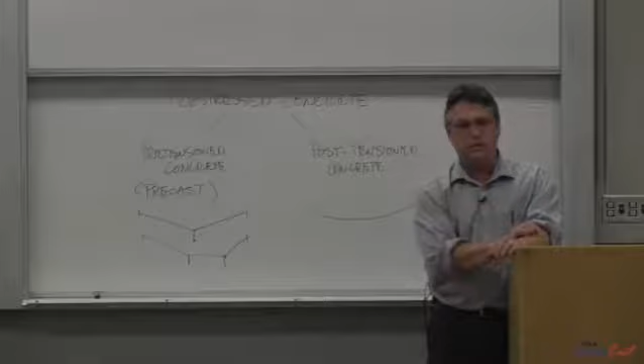While that's warming up, does anybody have any questions? I know you guys do.

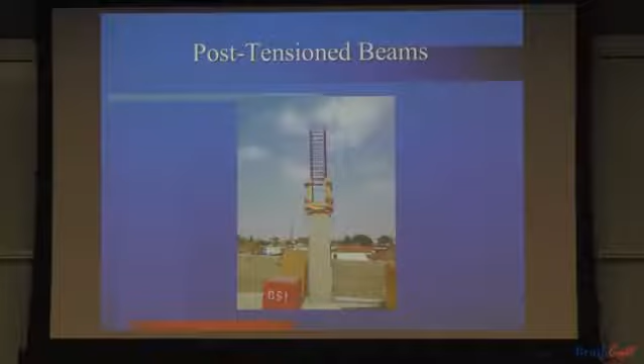This is a job, I think in Buena Park. This is a column, no big deal. This is waiting for a beam, and you are going to design in your project a 2-span beam, very much like the beams I'm about to show you. But this is how it gets constructed. The column comes first, there's a cold joint at the bottom, the steel beam form will fit right in there, and that beam will be coming out at us.

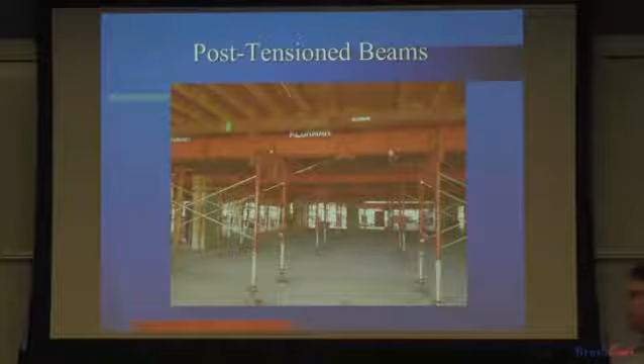I like this. I'm not doing much anymore, but for a long time in my career I did design-build, which meant I worked for contractors. On this particular job, a big one in Buena Park called the Source, we got the big parking structure. You'll never guess who the contractor was - Bill Klorman. He puts his name on everything, you can't drive by that site without seeing his name about 50 times. Good friend of mine, wonderful guy. In case anybody steals his forms, everybody will know where those forms came from. But he's a brilliant contractor and advertiser.

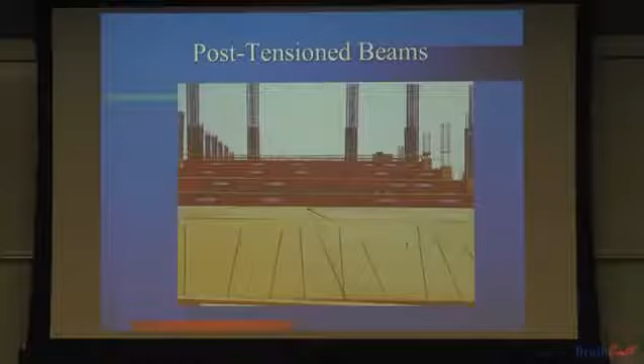This is a ramp, we're actually there building the forms. This is the plywood forms going on those steel beam forms. This is the ramp that's going up, that's why you can see all those - they're right in the middle of placing all of the plywood to make this ramp. So after this gets formed, this is the plywood.

We pre-stress lots of things, we pre-stress everything we can. This is the slab, this is the red - I don't see colors well, but I know that that's red. Is the slab pre-stressing steel? It's post-tension, it's actually in plastic sheathing, and if you come down to Coronado you'll see it in plastic sheathing. You'll be able to touch it - it's dirty, but you'll get a good feel.

We wrap it in plastic, and I'll show you those pictures in a minute, but the steel is actually inside the plastic. We want it to be able to move freely. It's greased, and the sheathing may bond to the concrete and will, but the steel inside that sheathing moves at will, and that's how we're able to stress it. The steel will move, the concrete won't. So there is no compatibility like you're used to, strain compatibility in post-tension concrete. You're used to strain compatibility in reinforced concrete because it's bonded. Post-tension concrete is not bonded. Makes it more difficult to understand and confuses people, but it also makes it great - by unbonding it, we're able to do some pretty incredible things.

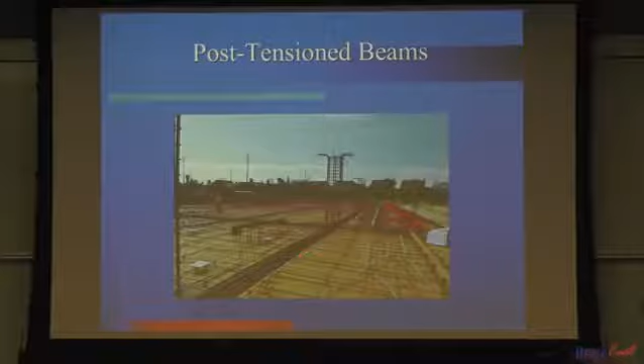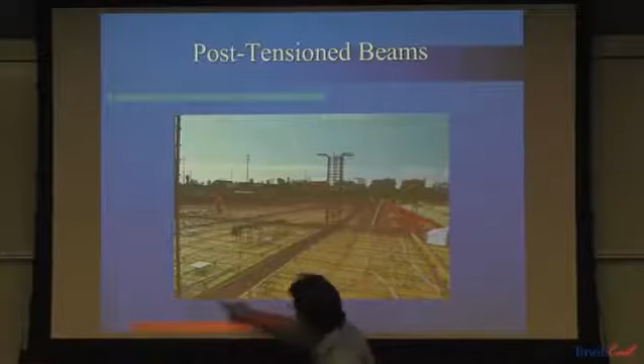So these are the beam forms, these are steel beam forms. That's a girder, these are the columns. The slab is post-tension, and if you can see, the beams are post-tension. This is actually what you are going to design in your project, a 2-span beam with draping post-tensioning steel.

That's a close-up, in this particular case a different job. The post-tensioning is black - every supplier has their own color, it just differentiates them. There's no difference between a red post-tensioning cable and a black one or a green one or a blue one, it just depends on who made it. Everybody knows DSI makes the black cables, and Millennium puts out the red, and you just know by looking at the color of the steel who made it. But this is a joint - we will take the post-tensioning steel high over the support and then drape it down in the saggy span where it wants to droop, and we will stress it, and we'll want to lift that beam.

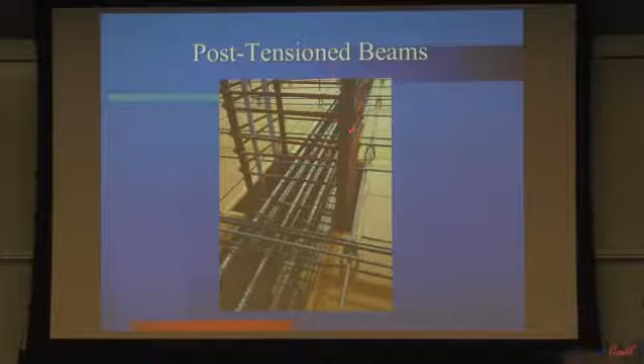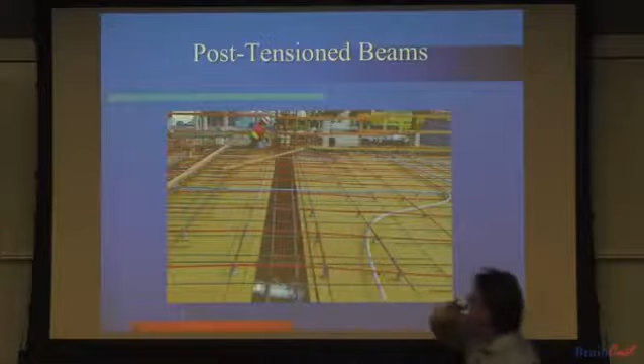This is looking right down the beam. I'm actually straddling it, taking this picture right there. But you can see this steel low, and then it's making its way up and splaying out at the anchorage zone at the column. And of course, this is the slab, also post-tensioned, high over the support, low in the span.

That's the way you would want to drape it, because when you stress it, it's going to try to straighten out. And when it tries to straighten out with stiff concrete, that lifts that concrete. We're shooting for not only compressing concrete, but keeping it flat. That's what's kind of amazing about post-tension concrete - we can effectively walk away from a building that doesn't deflect. It's damn near flat, straight, compressed, and almost crack-free.

And I'm in salesman mode now, it's less expensive. There's less concrete and there's actually less reinforcing. So why isn't every building pre-stressed? That's a great question. They all should be. They should.

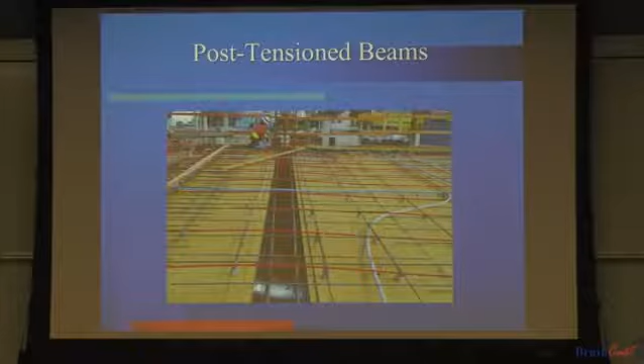I am baffled by why any building is reinforced concrete, and I really mean that. I've been designing on my own since 1997, the end of 1996. I've never designed a reinforced concrete building because I had the option of designing a post-tension concrete building using less concrete. It's less expensive, it performs better, it's almost crack-free and it's compressed. So to me, it's always pre-stressed. If it's really small and I'm doing somebody's garage or something like that, maybe not. But I've done a few things for friends.

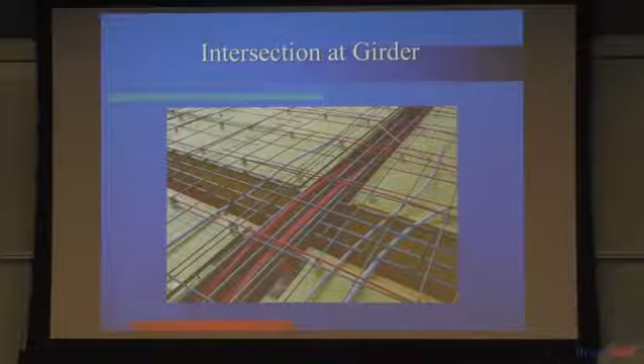So this is an intersection at a girder. There can either be a column supporting a beam, or there can be a girder supporting the beam. This is a big parking structure, so they couldn't have a column here because that's the drive area. You're looping around, circling around in a parking structure, always going under a girder. From now on, you guys should never be looking at where you're going - you should be looking up at the framing. That's what I do. I'm surprised I haven't gotten in any accidents.

This is the anchorage zone. These are the tails, just sticking out of the forms. This is just draped in there - there's no stress in it right now at all. It's just laying in there unstressed. It will not even think about being stressed until after all that concrete is poured and cured.

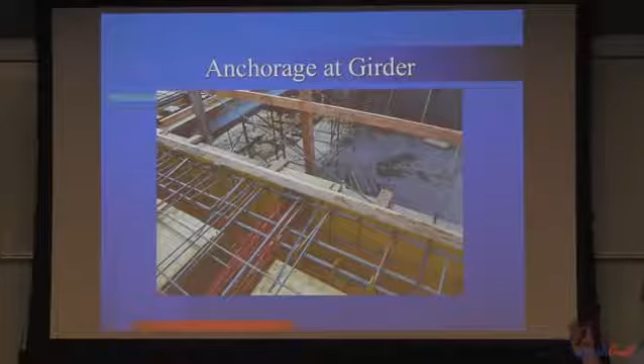We may specify 5,000 psi concrete, but we will let them stress at 3,000 psi in 3 days. So we use what's called high early concrete - that concrete accelerates very quickly. They will pour it often on Thursday, and on Monday - this is all around the Southern California area - they're pouring post-tension concrete on Thursday everywhere, and they're stressing it on Monday. That is the typical cycle of basically every job I've ever worked on. So Thursday is a big pour day in the Southern California area.

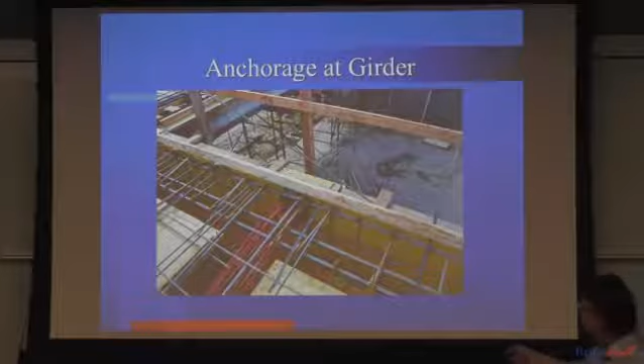But it's just sitting in there. These are pocket formers - you have to create a pocket so the jack that I'm going to show you can get in there and stress on it. But we leave a tail hanging out there so the jack's got something to grab.

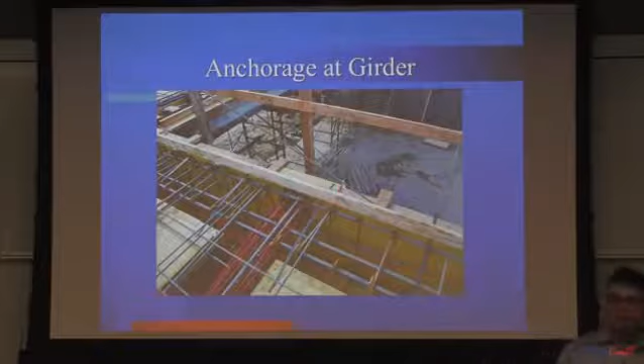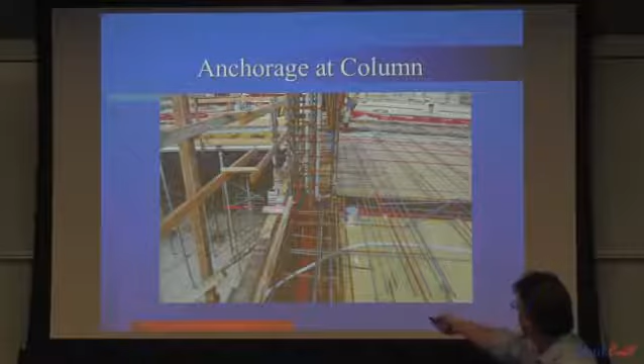Here's a beam coming in. The tendons have come up high and then they've splayed out. And there are anchors over here, and this is hanging out of the backside of a column.

This is a job called Midtown Crossing. It's actually, I think, 4550 West Pico. It's not far from here at all. It was kind of fun - I think this was 2011 that this was being built, and I was teaching this class, so I actually brought a few students over to see this being done. But I would actually just take pictures and then stick them in and bring them to class. I think there is parking, there's retail up on top now. There's a big Lowe's and a couple department stores next door.

This is after the concrete has been poured. It's hardened, the tendons have actually been stressed. And there's no beam form there. So once that thing is stressed, this is the amazing thing about pre-stressed concrete also - not only is it cheaper, not only does it come out with a better product, you can pour it on Thursday, stress it on Monday, and strip all the forms Monday afternoon. And that building stands there - it is standing up, holding itself up.

In reinforced concrete, how long - it's okay if you don't know this, but if you want to take a guess, it's fine, I don't expect you to know the answer - how long do you have to leave the forms in there before it's safe enough to pull them down and that structure won't collapse?

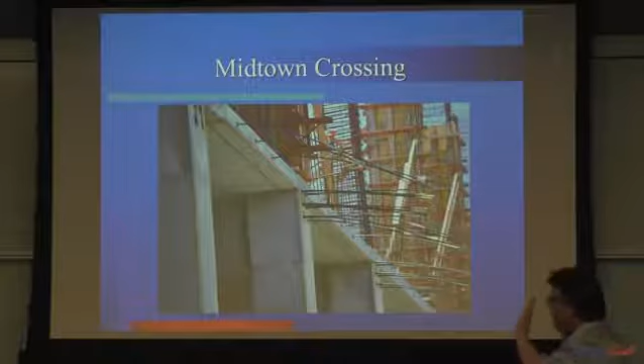I mean, there's nobody who can be doing anything. They can't be finishing concrete, they can't be stripping, they can't be working or doing anything in there. It's a jungle of forms.

But with pre-stressed concrete, we stress it, we pull it. I mean, 4 or 5 days later, you have free access underneath to start all the other trades: mechanical, electrical, plumbing. The guy's got to paint the stalls, put in carpeting if it's a bank, whatever it is, they have free access to it. Another one of the many amazing things.

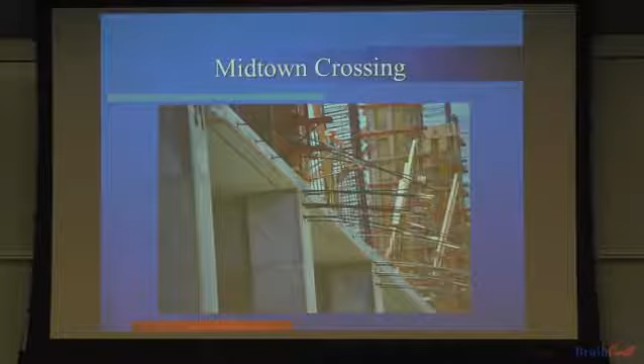This is a seismic shear wall. In California, I told you, become a specialist. I'm a specialist in pre-stressed concrete, particularly post-tension concrete. We're all specialists in seismic design. Every structural engineer in California is a specialist in seismic design. You have to be.

So that's a shear wall, that's a pocket waiting. Actually, I believe this is waiting for a girder, and these are waiting for beams to come in. But we give them a nice pocket to come and rest in.

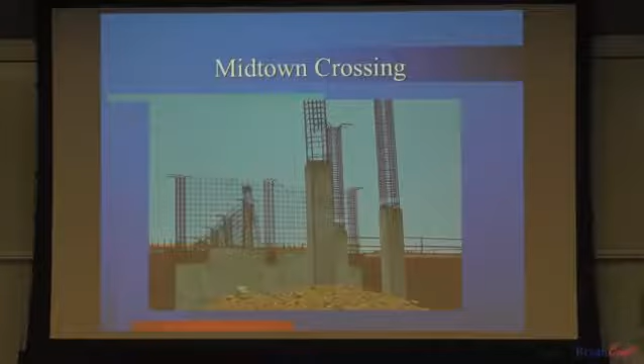People make mistakes, and I'm running into this a lot when I'm dealing with some of the code things that I try to review, examples done by academics and code people. And I can't tell you how often they forget that there's got to be a cold joint. Concrete's poured in stages. The columns get poured up to the bottom of whatever the floor system is, the beam, the slab, whatever it is, and that creates a cold joint. We need to connect one piece of concrete to another piece of concrete, and that's what happens. You need to give it a place to either sit on or connect to. Anyway, that's just something that's come up recently.

This, another thing I get in trouble for saying, this is the building next door. Anybody want to tell me what type of construction that is? It's not pre-stressed, it's not post-tension. Tilt up. How can you tell?

Because they're tilting it up in the picture, yes. Now they'll pour these big panels laying down, then they tilt them up using cranes and wires, then they hold them in place and wait for a floor or roof system of some very light joists, metal deck to come and hopefully kind of brace it.

And do they stay there forever? No, they just stay there till the next earthquake. I shouldn't joke around about that, but this building has suffered terribly in earthquakes, this type of construction. But that doesn't stop them from tweaking the numbers a little bit and coming right back and doing some more. It is the least expensive type of construction.

But everybody's got their thing. I think there's nothing better than casting concrete in place, in forms, post-tensioning it, and that building is solid. To me, it's the most solid seismic diaphragm, the most solid seismic system, the most solid vertical system for resisting loads.

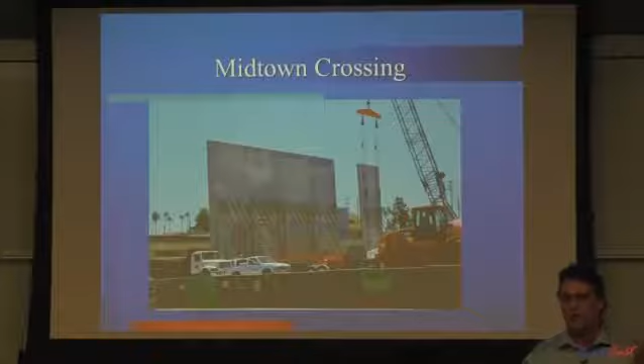There's a tremendous redundancy in cast-in-place systems. And particularly, one thing I forgot to mention, do you know what the limit is on how long a piece of rebar can be in a building? There's a practical limit. 40 feet? 60 feet? 40 feet, 60 feet... 60 feet, and that's all driven by highways.

That's the maximum length something can be on a highway and be transported, unless it's got some special permits and all that. So you learn that you need to detail your jobs not to have steel longer than 60 feet, really because the steel can't get to the job site on a truck. So post-tensioning steel, you're going to see in a minute, can be 300 feet long.

So what do you have to do with the mild steel if you want it to be longer? What do you do to it? Splice, lap — you lap it some distance. You run through all the code equations, and there's some 7 feet, 8 feet, 4 foot 6, 52 inches of lap in 4,000 psi concrete. If it's a Class B type, then all that stuff applies. But basically, they say that if you do that, you satisfy all these conditions, and you've got enough cover, you can effectively transfer the force from one bar to another. So you've effectively made it a continuous bar, but you have to do that through a lap, and you have to be careful how you do that.

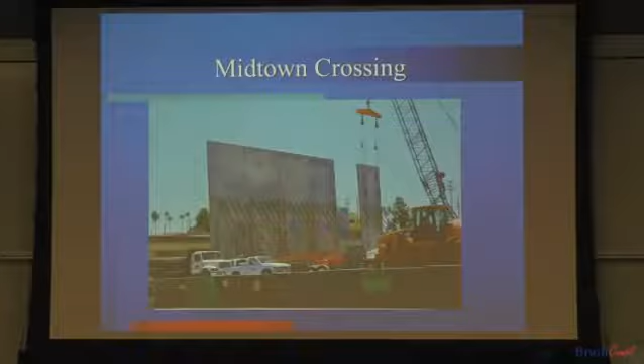In pre-stressing steel, you just unroll it. It is one piece of steel. We never have to think about laps in pre-stressed concrete. Another benefit.

Okay, so that's what a cast-in-place post-tension concrete building will look like. This is a parking structure. This was the situation where I told you, typically you'd want to use columns to support beams, but if you've got a drive-through, you can't have a column right there. The parking consultant won't let you, so you put in a girder.

We'll post-tension that girder too. Post-tension my grandmother if I could.

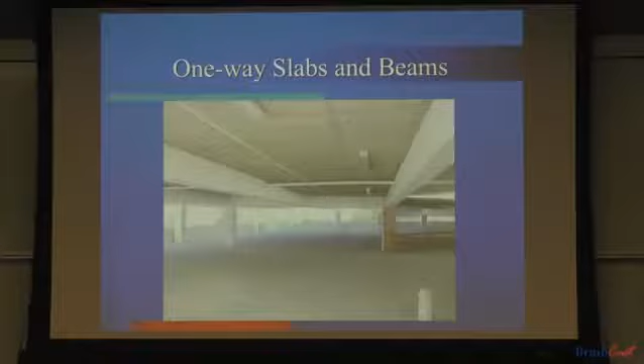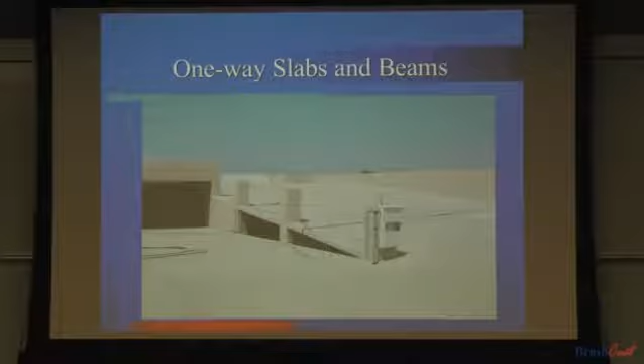This is the top of the same situation. Okay, this is an interesting one. This, in my early career, probably put me on the map. This is the one job I can think of where I went from being a nobody to being a somebody. This is the Howard Hughes Center, and KPFF actually designed all the steel buildings out there. We got 5 parking structures around there, and KPFF ended up moving into one of those. If you go interview or go over to their office, that's where they are right now, at the Howard Hughes Center.

What's interesting about this is it's almost identical to what your project is going to be. You're going to have a 2-span system. I've given you a different live load on one side than the other, and changed the spans to make it more fun for you. But you're going to design a 2-span beam with columns, and that's a typical post-tension concrete parking structure.

What's not typical about this is this level. We really didn't have any more headroom to work with, but we had to put an entire park on this. If you go to the KPFF offices or any of the other businesses there, they're out there having lunch and sitting around, and I'd bet most people don't realize they're on a parking structure. They just think they're in a park sitting there.

Now, most of this is foam. We've gotten really good at using what's called geofoam for a lot of different things. That's only about 15 inches of soil, and we had some boxes for these trees in here. But none of that would be possible without pre-stressed concrete. This just could not be done in reinforced concrete and be this thin going this far. This is about 65 feet. Those are 3 feet deep. We doubled them up—that's the secret up at the top level.

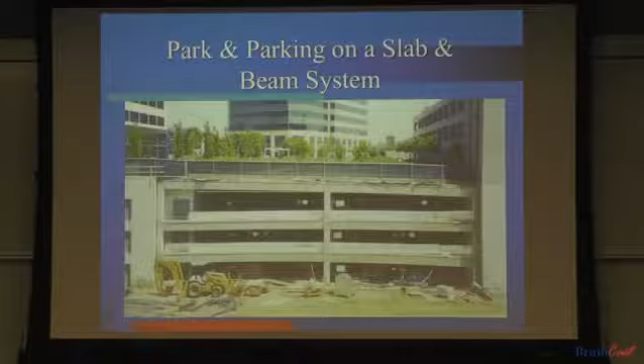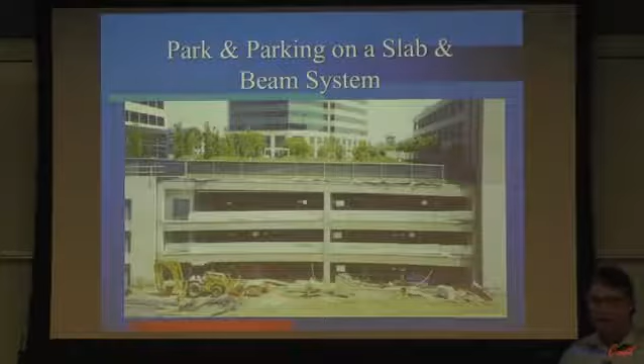I have so much trouble explaining to owners that in a retail situation or a wide open space, we have to design for 100 pounds a square foot. And that's 2.5 times what we have to design for in the parking area, which has valet parking effectively for SUVs. It's one of those hard things to understand, but that's the truth of the matter. Car loading is the lightest loading there is in the code. Apartments are 40 pounds a square foot—there's nothing less than 40 that I'm aware of in there. And car loading is 40 pounds a square foot. It's right there at the bottom. Everything else is higher.

Okay, this was many months later. I had been standing on the other side looking this way. Now the building's been built, and I'm standing here looking that way. This is that park, and I tell you, most people have no idea they're actually on an elevated structure right there.

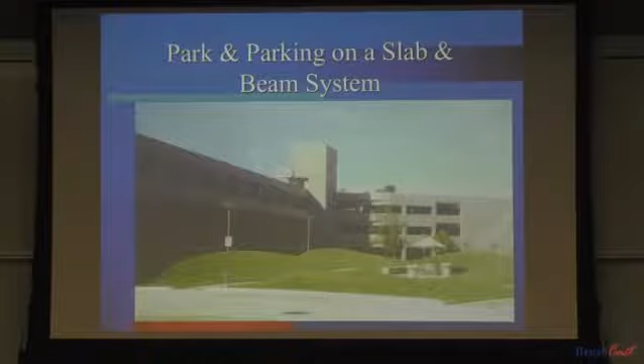On your project, you will calculate how many pre-stressing tendons there need to be. Each one's a 1/2 inch, by the way. In reinforced concrete, you have a number 4 bar, number 5, number 6, number 7, and you change all kinds. We only have one for all practical purposes in pre-stressed concrete—it's always a 1/2 inch steel. In bridge design they have some larger ones, 0.6 inches, but for all building design, parking structure design, podium design, bank, medical office building, we're talking about 1/2 inch tendons. They're always good for, we'll stress those to be about 26,000 pounds. So you're going to have to figure out how many of those you need. In this particular beam, it's 11 strands, but it'll be part of your design. We'll do it together, don't worry. We'll be determining the pre-stressing steel.

Now, in any pre-stressed concrete member, post-tension or pre-tension, there's also always bonded reinforcement—the same reinforcement you learned about and designed in reinforced concrete. You think of pre-stressed concrete, the pre-stressing steel is additive to that. It is the primary reinforcement, but it will still always have mild non-pre-stressed steel also in the beam or slab.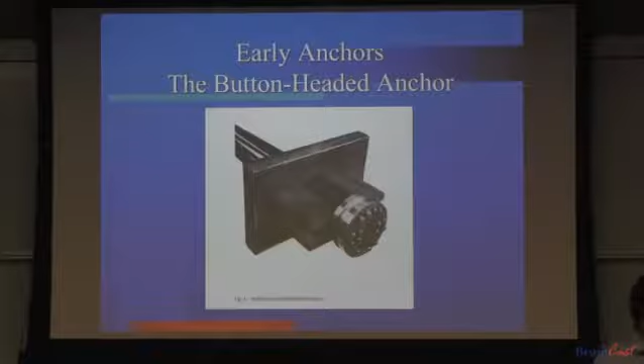This was the first iteration that didn't work out so well. This is the next iteration that also didn't work out so well. They tried a spring coil, thinking that by getting all the concrete and grout in there it would just lock it up, and they trumpeted it down, but those things failed way too often. Then they came up with the right answer, and it's the same answer we've been using now for decades, and it works.

This is the Sherlock anchor. This is two of them - I've put one side by side and just turned it over so you can see front and back. At every single half-inch tendon, one of these will be placed. It has a trumpeted, tapered hole in it. The tendon comes out, the pre-stressing strand comes out.

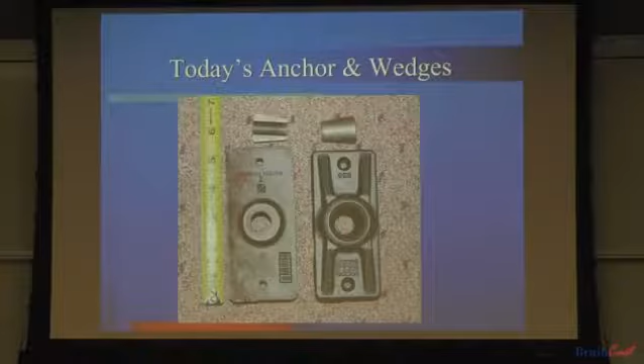These wedges will end up going in, and as it tries to recoil back in, it stresses it under tremendous force, and then when it tries to recoil, those anchors, those wedges will lock it in. That works, and that's been successful, and nobody's trying to come up with anything different. We came to equilibrium - we found something that works, and that's what it is.

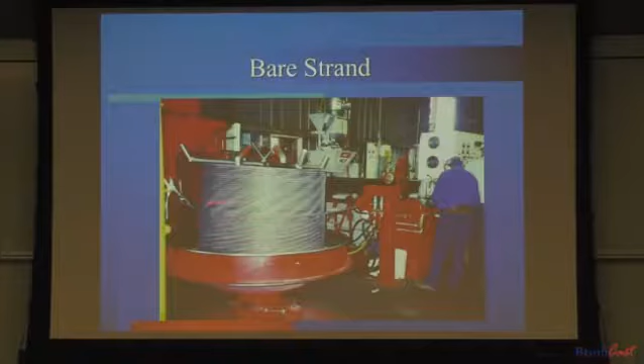Okay, I'm going to start moving along because I'm running late. But this is the DSI plant in Long Beach. It's actually just a big coil of half-inch pre-stressing steel. I told you it gets greased, so here is the ugly, messy greasing process.

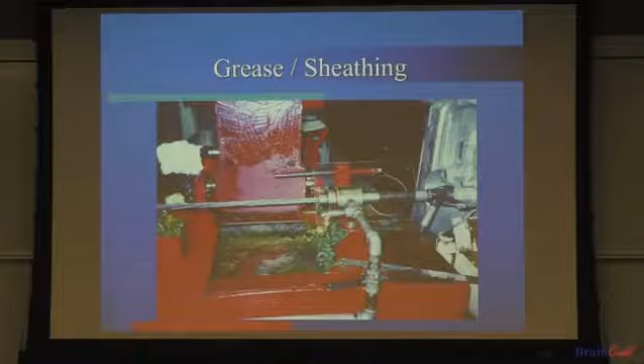This is called a strand, and I'm going to use the word strand and tendon interchangeably because I'm lazy and sloppy, and I have been. They're really the same thing. The strand is just the bare steel. Tendon is the whole system of grease, plastic, anchor, and strand. So technically, ACI's definition of tendon is a strand with grease on it, with plastic around it, anchored at the end with an anchor - that's a tendon, that's one system. The strand is just the steel in it, but most of us are lazy and we just interchange the word strand and tendon.

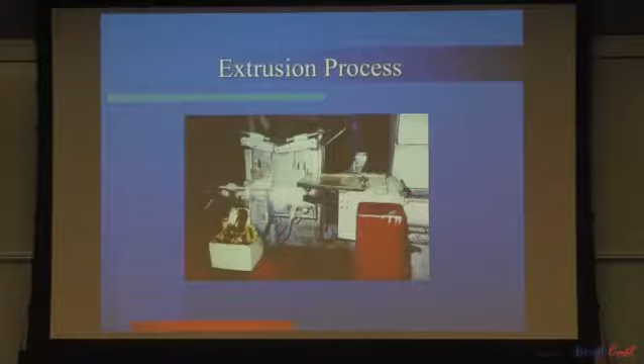This is where the hot molten plastic gets put on. It's loose around the tendon or the strand as it's coming in, and it goes right into this water trough, which cools it down immediately, and then it shrink wraps right to the grease and the strand.

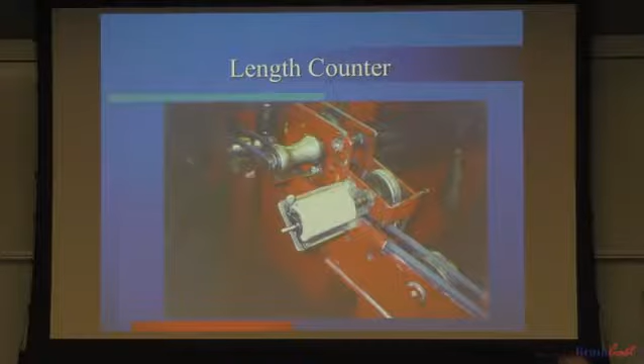This is the high-tech counter they had when I was there. You'll specify on your jobs, and they'll have to determine - it won't be you, but the person creating the shop drawings off of your drawings - we'll say there's 40 140-foot long tendons, so they will cut 40 140-foot long tendons at that plant, and there'll be 30 160-foot long tendons, and shop drawings will be created. They will show up at a job site in a big bundled roll. That's why I said there's no 60-foot limit - they'll just roll these, and they can make them really as long as you need it to be.

Back at the job site, they will really just unroll these. This is a construction joint. We use it because floors are often bigger than the concrete subcontractor can place at one time. They're usually about 20, 22, 24,000 square feet, and you can easily be on a job with a 100,000 square foot floor, so they'll do it in sections. Another benefit of prestressed concrete is you can just unroll that right through the form and leave it there waiting for the next pour.

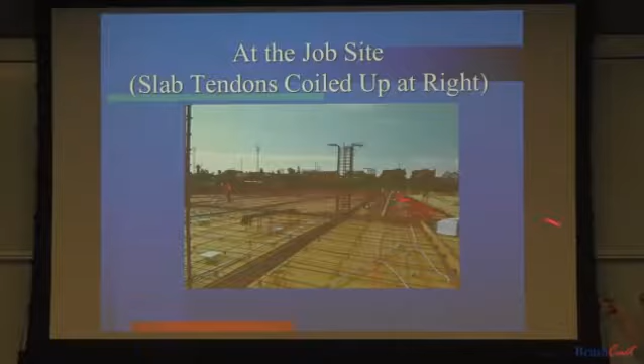See if I can get this right.

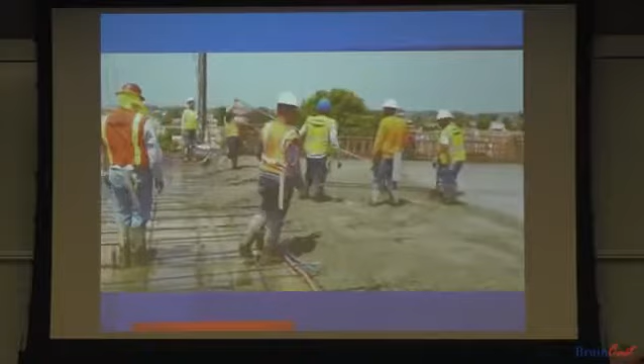So I just pulled out my iPhone and took a picture, but watch this. Who's this guy? He's the most important guy there. I want somebody to guess what they think he's doing. Vibrating the concrete, always important in any concrete. You can hear him over here.

In post-tension concrete, this guy is the most important because I'm about to show you pictures of what happens when the concrete isn't vibrated correctly near the anchors. At the anchors is where all this tremendous force comes in, 26,000 pounds at every single anchor, and we'll line up 30 of them in a row on one of these flat plates. Bad things can happen.

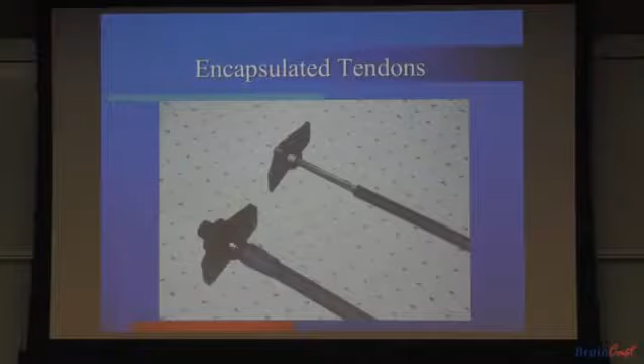This slide is kind of irrelevant now because the 2014 code mandates that all tendons be entirely encapsulated. That means they're isolated entirely from the concrete elements, water, salt, anything that can get in there. That steel lives inside and will never be in contact with anything, which keeps it from corroding. This is an encapsulated tendon on the site.

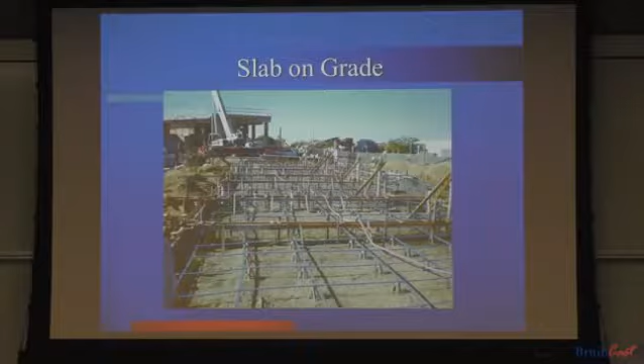This is a slab on grade. Actually, slabs on grade are the most popular. More post-tensioning is sold in slabs on ground throughout the country than in elevated structures, which is kind of fascinating to me. But foundations are quite a niche to get into.

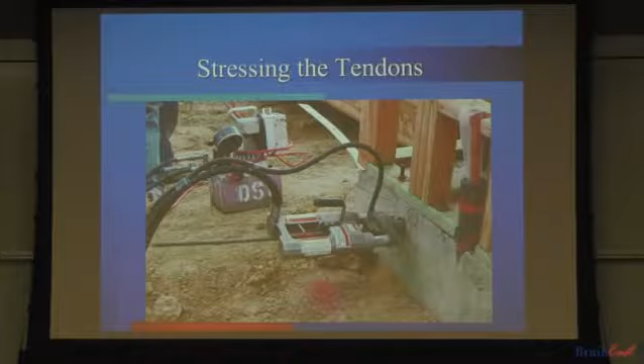This is the pocket former, the piece of plastic that will come out. This jack will be placed in there. The pocket former comes out, creates a hole that allows the nose piece to go in. This jack locks onto the anchor and stretches it. I'm not talking about picking up slack or straightening a loose tendon, I'm talking about PL over AE, stretching steel. That piece of steel will be stretched 8 or 9 inches, and it takes a strong jack to stretch steel that much. That's how force gets into the system. Then the tail gets burned off.

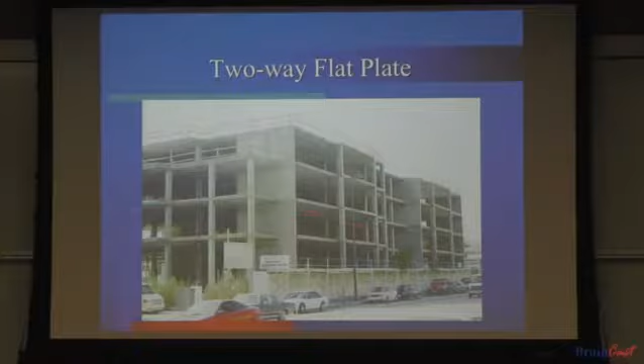I'm going to teach you more of the fundamentals of beam and slab design. The next step after that would be to learn how to take all the beams out and make it work just as a slab.

This is that same spot, standing in the same place, because this was the restaurant I always went to whenever I did a structural observation, and I always took the picture, but you can't tell if that's wood. It was actually originally designed to be a steel building, it's an assisted living facility. If it was residential, it would have been wood, but older people in assisted living facilities can't be in a flammable wood building, so the choices were steel or concrete. We saved about $1 million by converting it from steel to prestressed concrete.

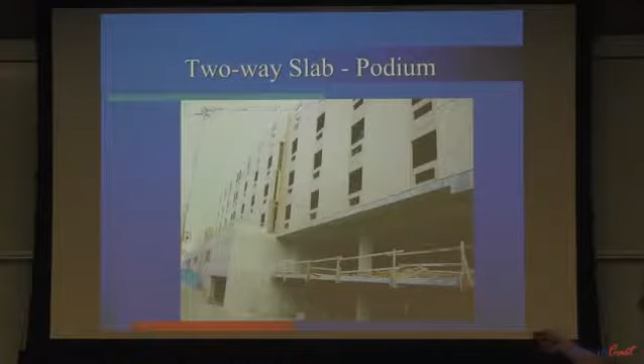But all of that concrete is pre-stressed. That's what I would get hired to do. We did from here down. Another engineer did from here up.

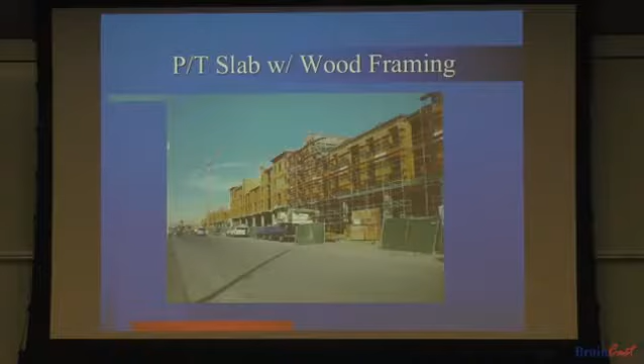There was a time when these things were hugely popular. We're not doing a lot of them right now. Construction goes in phases, and what's popular changes year after year. But right now we're doing what are called wrap parking structures. So this is the wood framing on top of the podium, and an architect covers it all up, and you don't even know what materials you're looking at anymore.

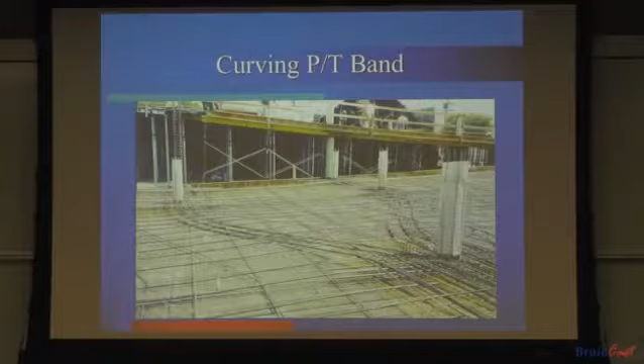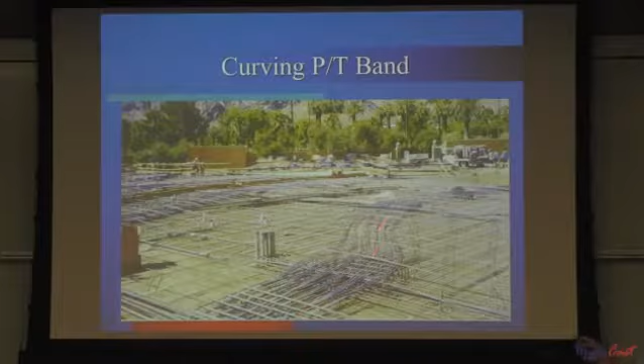We did this. I don't like doing it, but I did take pictures of it. I try very hard now not to do it. As I get older, I get more conservative, and we've had a few good blowouts doing these things, so we don't do it anymore. When you put a lot of pre-stressing in one location, it is very important, and the code requires that you confine it.

This is why. They were moving along. Everybody was happy. They were stressing. This is probably 3,000 or better concrete. And bam, at one point, because this concrete was not vibrated well, that guy with the vibrator didn't spend his time at the anchors. He spent his time way out here where it didn't matter.

And the contractor ignored our detail about confinement because this was a construction joint. They thought it only applied at the edge of the building. And we told them, concrete's not all that smart. It didn't know that this wasn't the edge of the building. It thought it was the edge of the building. So it exploded.

This is high-strength concrete, and it's nothing but dust. And people will tell you, I'm good at pre-stressed, contractors. Well, I'm good at this. I know, I've done a lot.

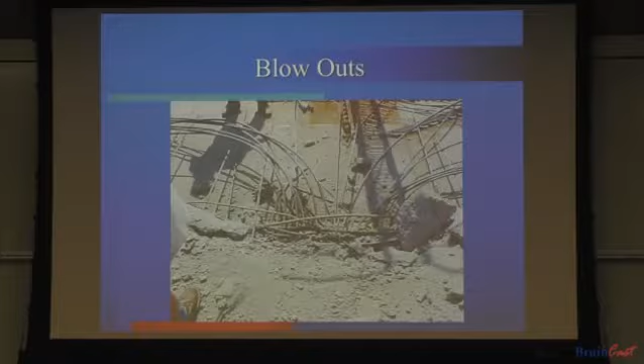Well, until they've had a real blowout, they don't really respect it. And these blowouts are good every once in a while. It unfortunately goes out and causes people who quit smoking 10 years ago to start smoking right then on the spot because there's concrete chunks this large, 40 feet away, that were flying by them. And they say, wow, I respect pre-stressed concrete much more than I did yesterday.

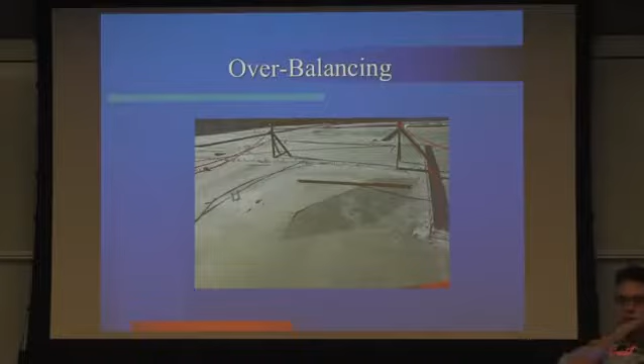There's going to be a concept that we're going to talk about, but overbalancing. You can drape too much. You can put too much post-tensioning in. And that is the biggest problem in pre-stressed concrete, is too much. And that's why engineers are scared of it.

You can't really make a steel beam too large. You can't really make a wood beam too big. Nothing bad happens when you do more. And engineers, this is good, more's better. And that's what you're taught. That's what we're all taught, right up until you get to pre-stressed concrete.

Too much can explode things. Too much can cause this big, huge bubble to shoot up on a building. The problem in this was not our building. This was an engineer who draped and designed putting all the loads on the building. There's a 4 or 5 story building coming, but it's not there when it got stressed.

Totally forgot that one of the controlling analyses in a pre-stressed concrete building needs to be when there's no load. The no load situation can be the worst case. You put 450 pounds a square foot on this, and that might not have happened. But you've got to understand that in pre-stressed concrete, you have to look at every possibility. You have to look at what happens when there isn't load there, and you can overdo it.

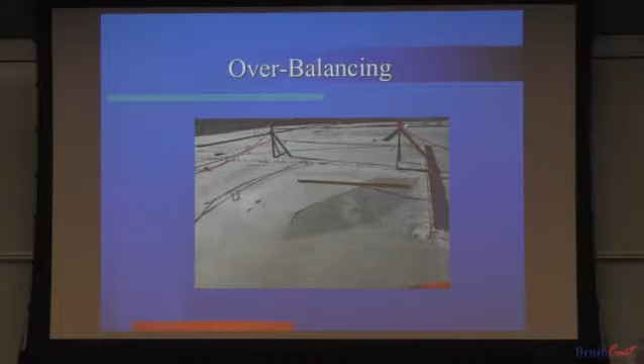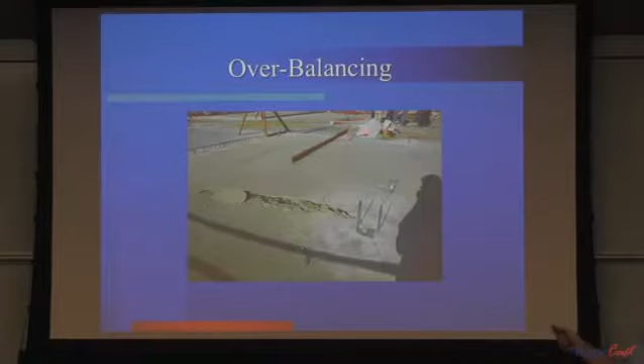So pre-stressed concrete is getting it right. It's not doing too much. It's not doing too little. It's figuring out exactly the right design. This is looking at that from another direction. Look at that. This is supposed to be flat. This was a very expensive fix, by the way.

Punching shear is a big problem in all of concrete, particularly in pre-stressed concrete. We make the decks thinner, and if you do flat plates like I do, your biggest worry that keeps you up at night is this: because you made that deck thin, you don't want it to punch through.

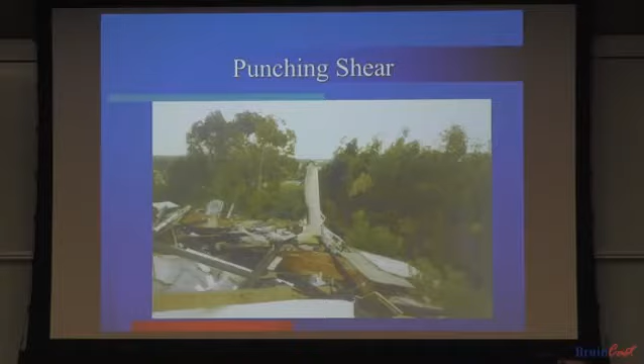This was the Northridge earthquake. It punched through because it lost connection to the seismic system, but all it needed to do was move enough to create a shear beyond the capacity, and this thing came down.

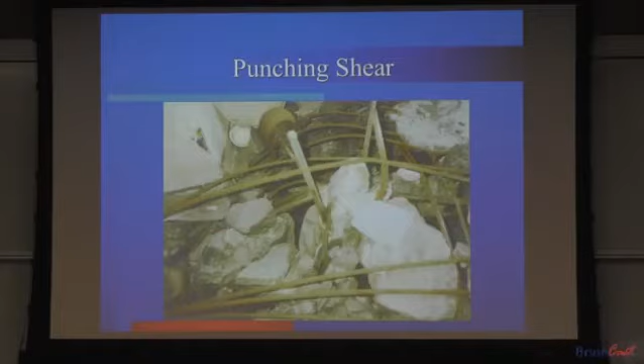Now, this is one of the dumbest things I ever did. I crawled in underneath and took this picture. I never would recommend doing that. I will never do it again the rest of my life. But these are the kinked post-tensioning tendons coming over. Just a couple of them in each direction were enough to hang up on this column.

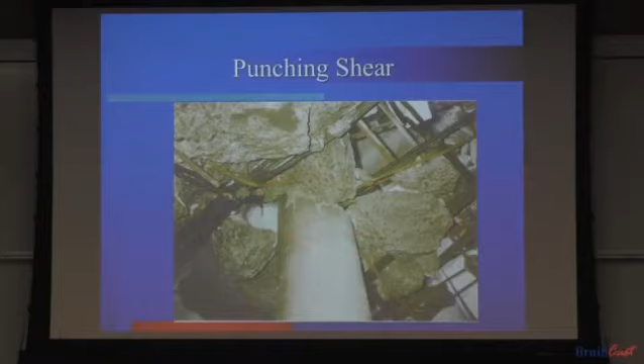That cap's gone, that's just rubble of concrete right now. The only thing that kept this building from collapsing—by the way, this is an apartment building with 4 levels, and just about everybody was home—and for the most part there were no deaths. But had this not been a post-tensioned concrete building, probably the entire thing would have failed.

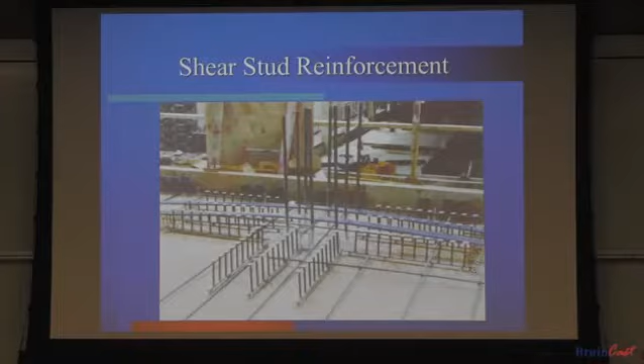So when we're doing this, we make sure to get a lot of pre-stressing steel, a lot of post-tensioning tendons right through the column. Not only do we do that, our steel goes right through the column, so in a terrible event, that steel would hang up on that column. We also reinforce with shear studs.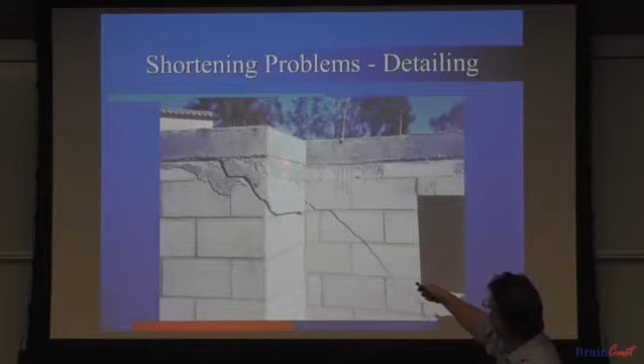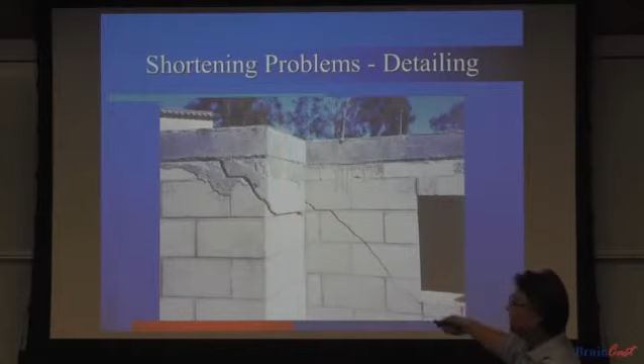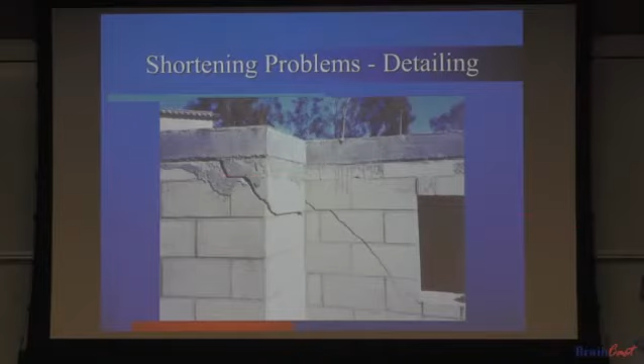I told you, we do what's low, they do what's high. Another wood engineer was supposed to design all this. He put a plate in. We told him, don't connect through our deck, we have a slip plane, we have masonite board there—this needs to slip on top of that concrete, that masonry wall. Well, he put dowels in, told us he didn't do it, and then we stressed it and said, you want to tell me again that you didn't do that? Those dowels from that plate came down into this, grabbed onto that, and just tore that masonry wall apart. That's out in Palm Desert.

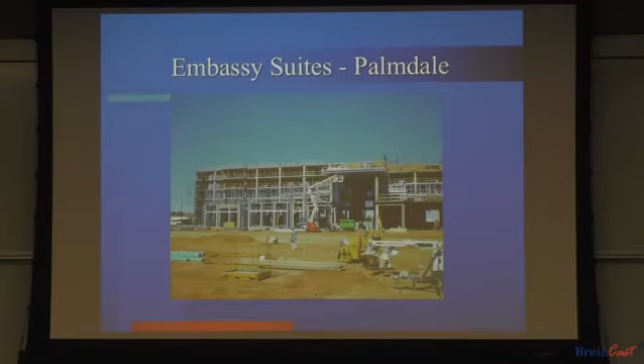I'm just going to flip through. This is an Embassy Suites in Palmdale. We do hotels—we did Embassy Suites in Ontario too. They're fun. This one was all designed in steel in the front and reinforced concrete in the back. We made it all pre-stressed concrete, saved a boatload of money, and had a lot of fun doing it. Embassy Suites oftentimes brings their pool inside the building, so we had to long span across it. We got a lot of different framing, which, when you get to be my age, is the fun you get to have. This is the gunite pool within the building.